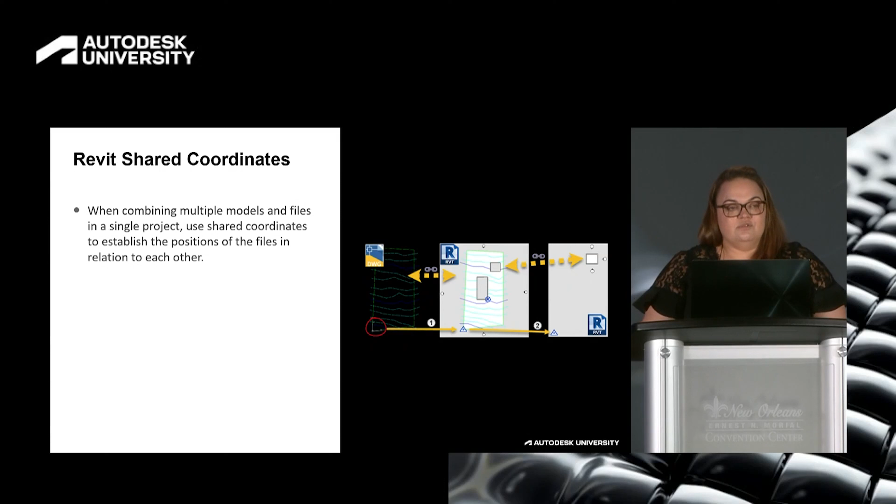Okay. Got it. So shared coordinates are pretty important. When combining multiple models in a single project, they are probably one of the most important things you can do, even though people think that's not true. Waking up in the morning is the most important thing you can do. So we use them to establish positions, especially if you have multiple files that you need to align, which if you're using BIM, or even if you're using CAD or Civil 3D, you still need everything to be in the right place.

So are they the same for everyone? Generalized feelings about that? That would be a no, right? Yeah, okay. I really wish, because if Autodesk could figure that one out, I swear I would just come work for them and call it a day. But no, there are global coordinates, GIS coordinates, grid coordinates, project-based, state planes, and then our favorite term, shared coordinates. Now, shared coordinates mean nothing to anybody who doesn't use Revit. They just want to hear geolocation.

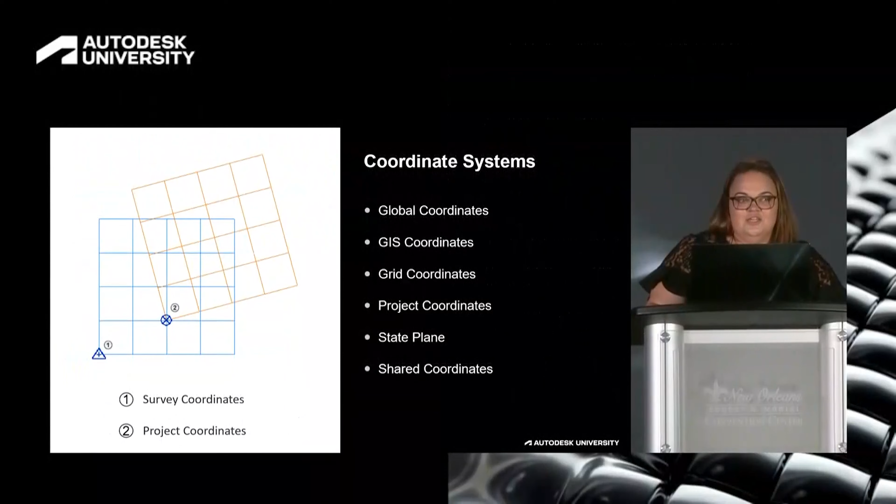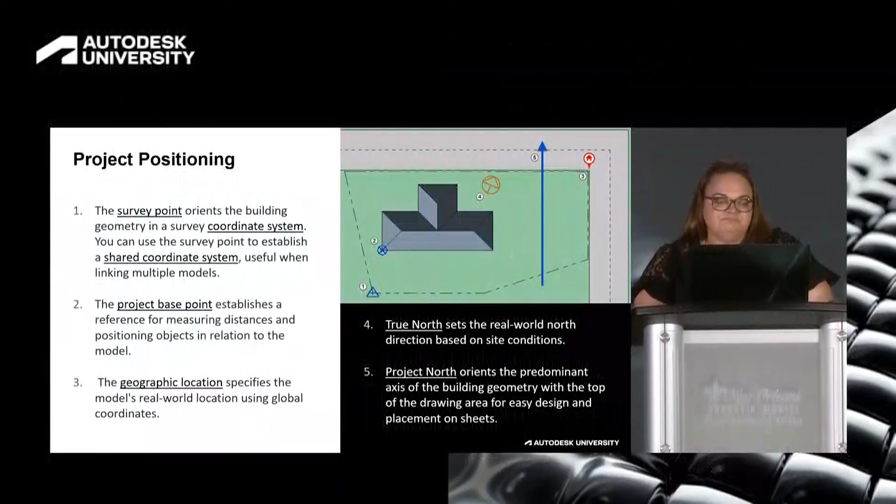So we'll talk a little bit about the relativity of internal origin and the base point and the survey point and your levels, just because I want to give a general background for you. If it's too boring, I won't shun you for looking at your phone. It's fine. Survey point is something that orients the building geometry in the survey system. It is used in Revit to base your shared coordinate system off of.

Now, there's also a project base point, because one thing to work on was not enough. Project base point establishes the distances and measurements, but it is pertaining to each individual file. And then there's the geographic location, which just tells you where it is in the real world, but in reality, in a Revit file, doesn't do crap.

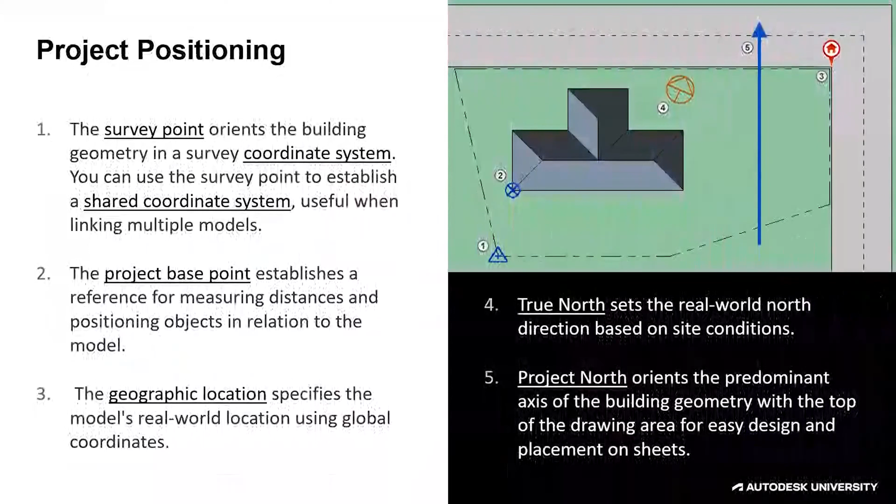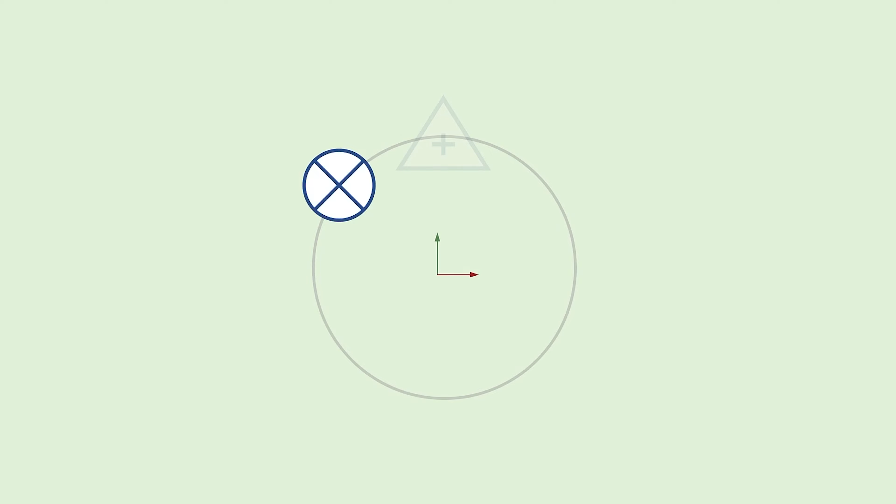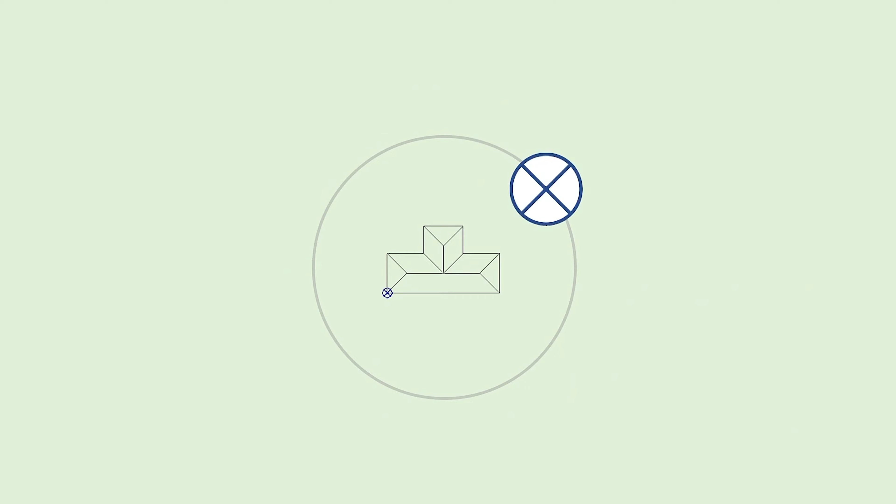It's fine. So this is how I try to describe it to my staff. You have an origin point of the file. Most files do. Then you have a survey point, which relatively revolves around the origin point. You have your base point, which also revolves around your origin point and your survey point. The survey point will dictate where it is in space or in the real world, and then your project base point is where that file is around everything else.

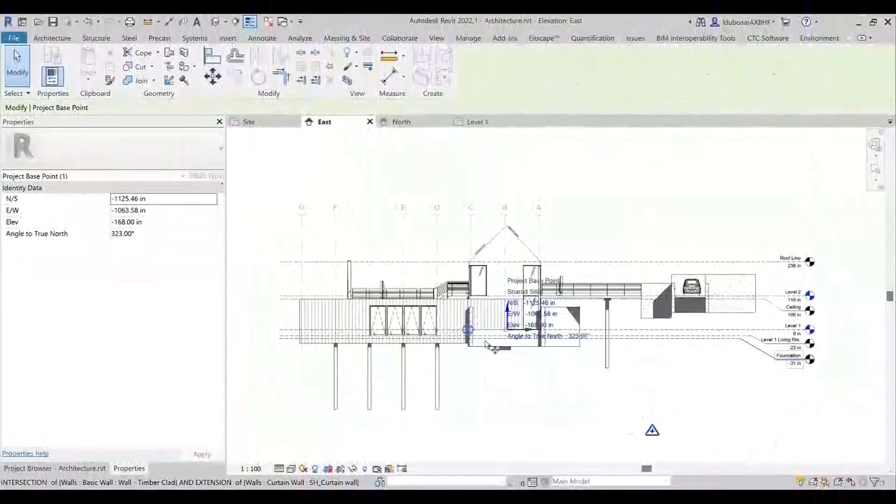The project base point, which is being indicated, that's going to tell you where those levels are going to sit. So the levels themselves, because more complications are great, there's two different ways to do that. You can tell that project base point in the levels to be showing whether or not it's relative to the survey point itself or relative based off of sea level. Again, that's one of those things that's a hard thing with the contractors.

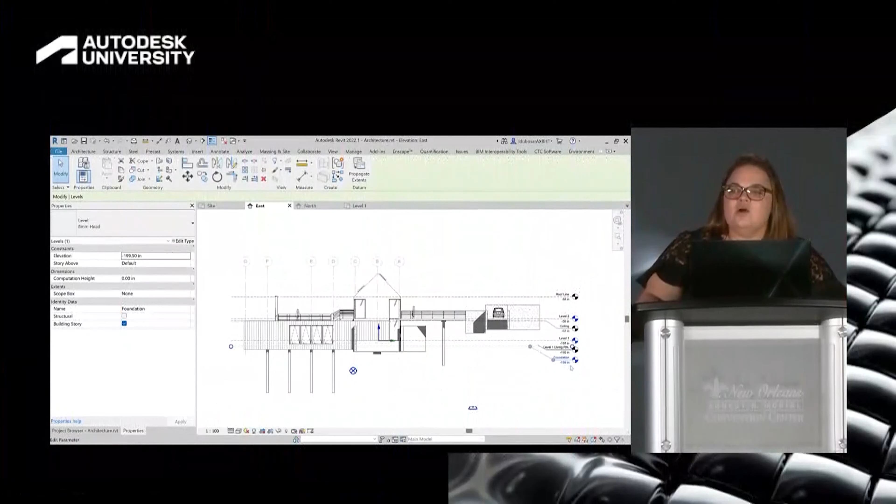No offense, guys. But my favorite question is when somebody goes, can we show both? No, not without a lot of extra work. Please don't ask that question. We hate it. It's okay. You want to coordinate with your contractor as much as humanly possible. And see, you guys like me again when I say that.

It's true. The earlier you talk to a civil engineer, the earlier you talk to all your consultants about what their preference is, the better off you're going to be. A lot of architects, don't hate me now, a lot of designers in general, end up being in a silo. So how often do we end up getting a civil survey before the project design starts? Has anyone ever had that happen? Oh, one. Damn, you're lucky. Okay, well, you don't count for this one.

I have never worked on a project as an architect where I have received civil information before somebody decided to jump the gun and start designing on a project. And I really wish I will one day. Who knows? The biggest thing is when you sit down and try to figure it out, you don't want to ruin everyone's lives by setting them up and then making them start all over and causing extra work, because then the client gets a little pissed off at you when you add an additional service on at the end of the day and you say, well, I worked an extra 15 hours to adjust my files. We all love that one.

So do you need to establish them? Guesses? I see yeses in this and a no. Honestly, no, you don't have to. So not technically, right? However, do they make site coordination easier? That's where everybody goes, yes, they do. Hell yes, they do. Are they a pain in the ass to set up? Yes, they are. So who's responsible for establishing them? Yell out answers.

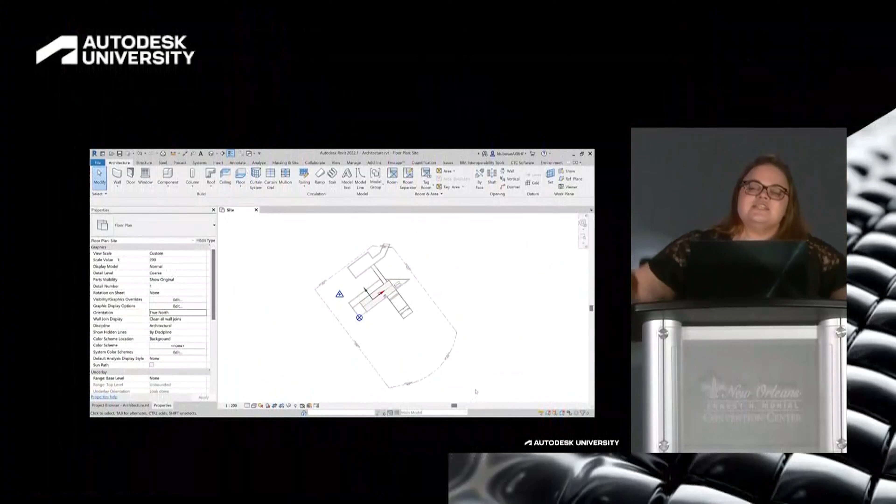We create a holistic, singular file for shared coordinates that ends up getting shared amongst all of the consultants. And that file is usually based off of the survey. I say usually because there are instances where your survey point or the information is miles and miles away, like miles. Now, who in here knows that Revit doesn't really function that well away from an origin point? All of you, just raise your, it's okay. Yeah, they haven't quite figured that out yet. One day, probably not, in like 2050.

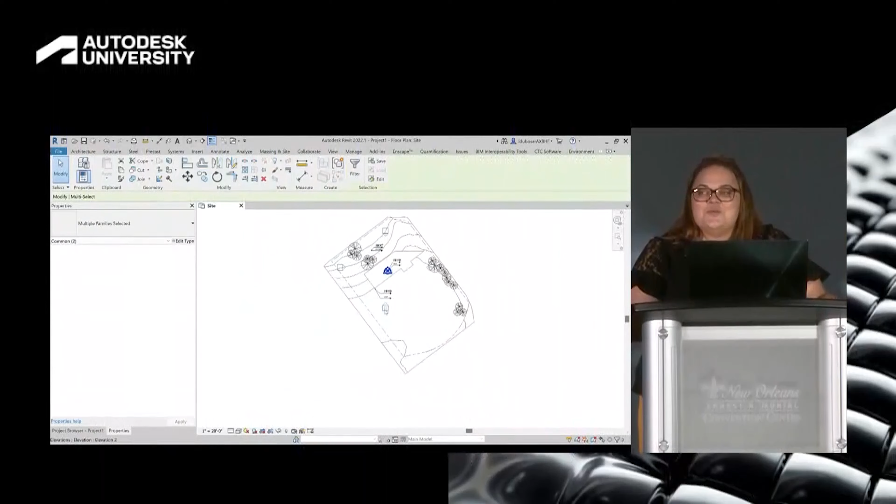Essentially what we end up doing is, if it's within reason, we take the civil survey, we create a standalone file, and we import it after cleaning it. And I have to say clean it because, no offense to the civil engineers, there's a whole lot of crap in there I can't handle. It's just a lot. So we clean it, showing usually the site boundary, and we work with you to specify which of those control points we're going to use as our shared coordinate point.

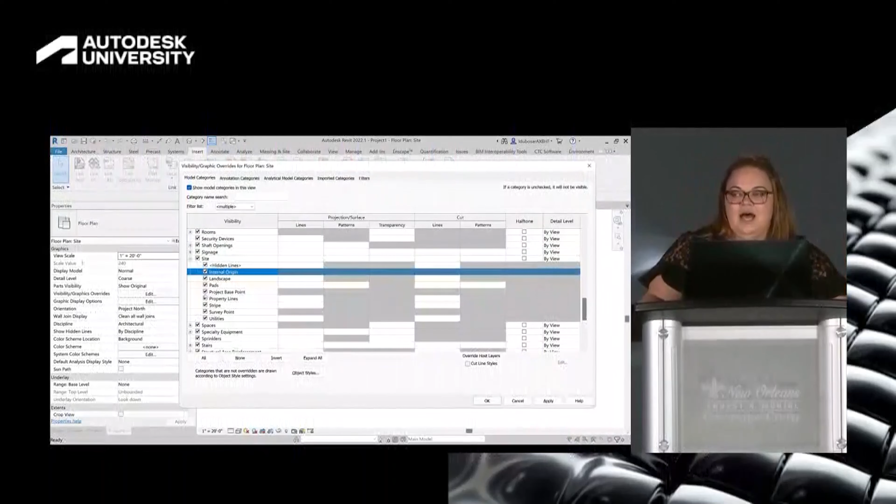All you need is one, not 4,050. However, it takes about 6 months to try to get the point across that we only need one. Sorry. And that's for everybody. We're not great at communication. So you need 1 point. You bring in that file to true north. That's very important, is how we do that.

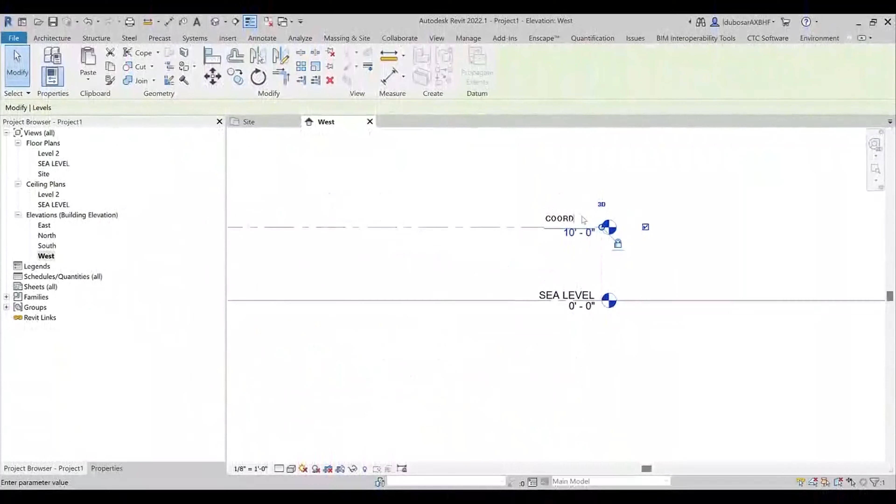We set 2 levels. We set one at sea level, which is our 0, 0, just for the shared coordinate file. The other is going to be where our coordinates are, like the survey file or the CAD link, not import. Please don't import. Makes me sad. Link the CAD, because you will end up getting updated information inevitably, or at least I hope so, based off of Civil's info. And that is where we're going to place that one file, right? So it seems relatively easy.

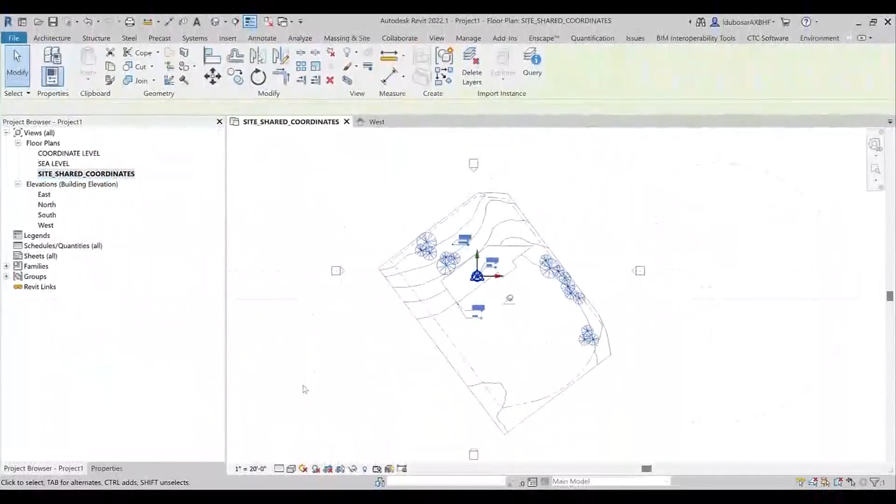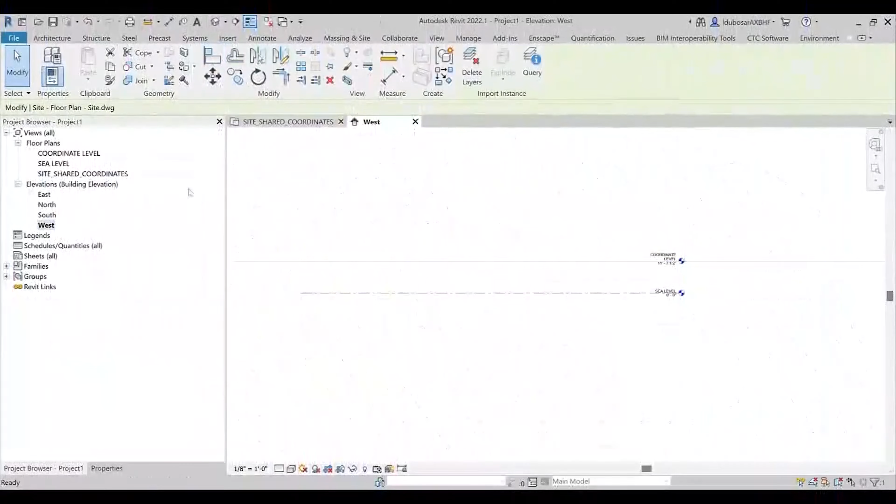The other thing you're not seeing on the left-hand side, we have deleted everything out of this file that we possibly can. Purge the hell out of it. No sheets, no schedules, no nothing. All we have are the base views that we need, and it's really only one plan view, and a couple of elevations if we need them, and that's about it, right? There is a strategy behind that method so people don't get confused later on.

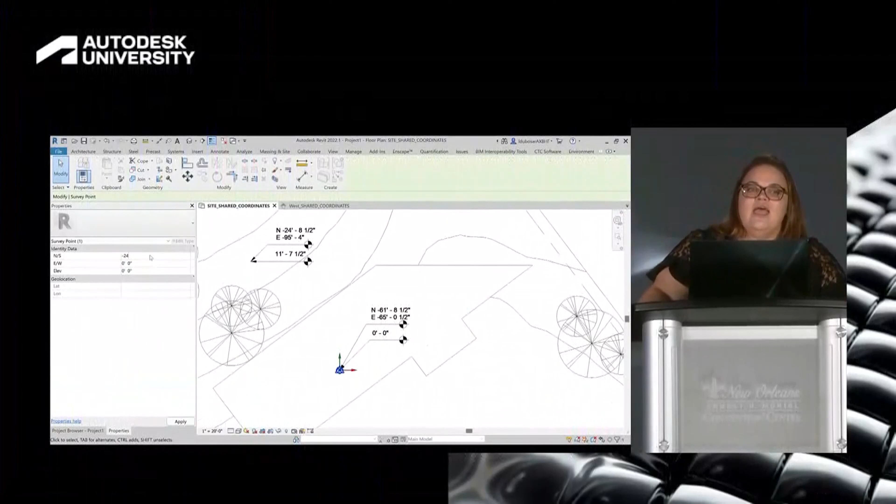So we're labeling everything because, you know, we have the most patience in the world to be able to do that. And only BIM people right now and managers and coordinators will sit down and say the importance of this. If you ask a designer, they're going to leave it View 1, View 2, View 383, because it's super helpful.

We're going to indicate and move that survey point based off of the information, which we have also left in that file so that people just have to see it in their face. We're going to place that survey point after we've unclipped it and entered the information. That way we can put that survey point wherever the hell we want. It could be on Jupiter, and I'm still saying it's on Earth. However, our mileage restriction in Revit might have an issue with that.

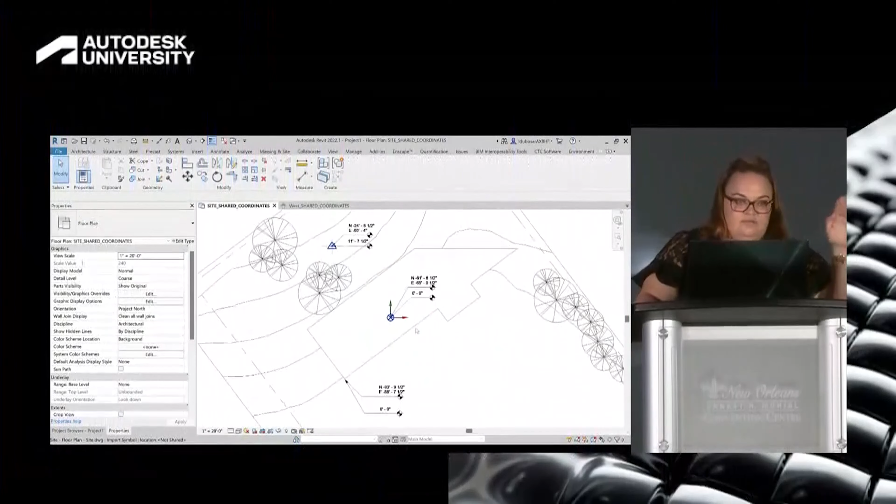So after that, you want to place your project base point, and that is relative per file. We tend to leave it at the origin point. It's way easier to handle, just for the shared coordinate file, not for the individual building files, right? Then we go through and make sure that everything is where it needs to be elevationally, because we check 4,000 times to make sure we didn't mess this up and have to do it again. And then you pin everything as much as you possibly can.

And also, the reason we have a separate file is because we don't really want sticky finger syndrome happening, right? I don't want anyone touching my single source of truth. So we use BIM 360 or ACC or whatever they're calling it after our keynote this year. It is really important for us, especially in a cloud-based environment, that we get this right, and then nobody ever touches it other than people who understand how it affects everything.

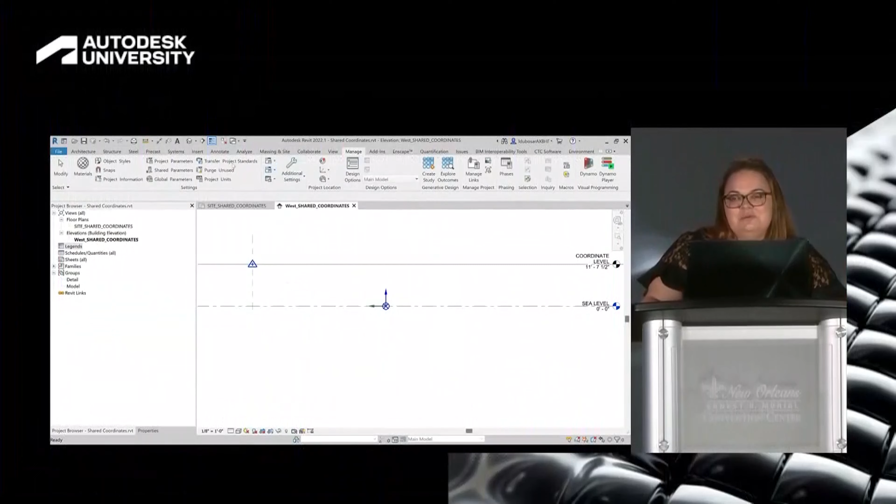As you can see, we purged 3 times. Who knows why we purged 3 times? Not one of you knows why? Nesting. It's a pain in the ass. 3 times will get you your magic number.

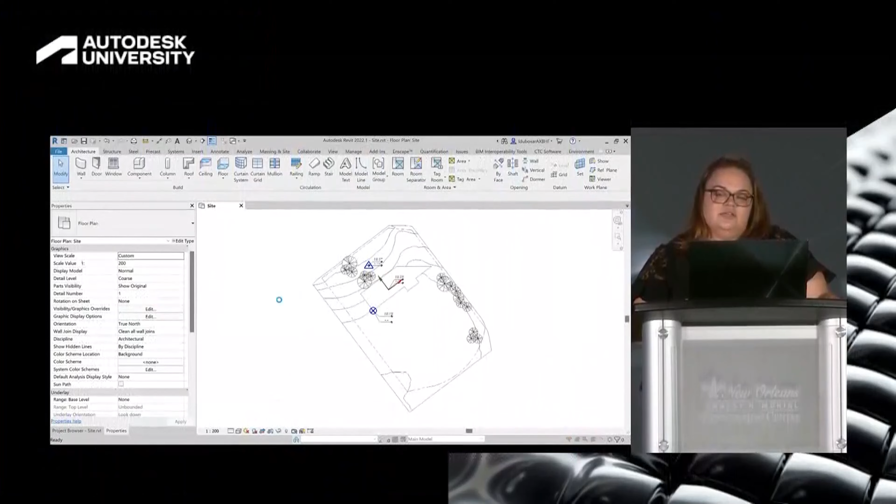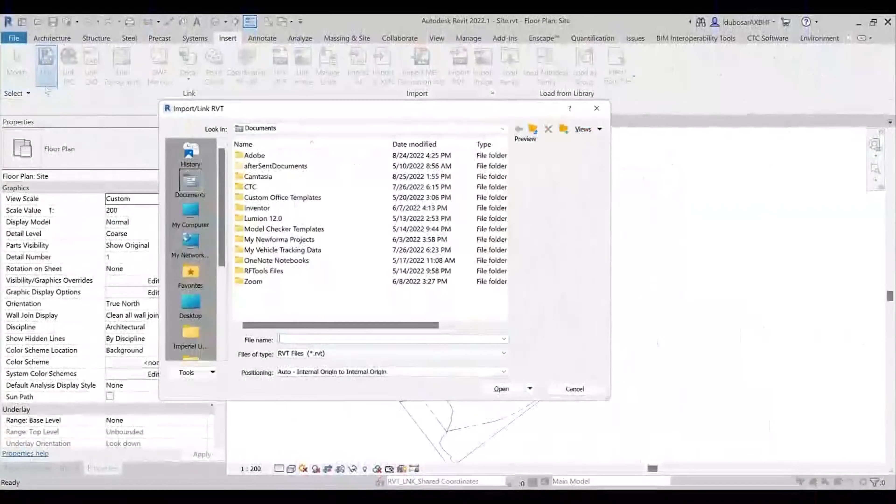After we do that, we're now pretty much theoretically set to acquire the shared coordinates, okay? So you're going to bring that file into your individual building files, whether it's MEP, structures, architecture, site file, you name it, it's going to be brought in. Now, again, we label everything. We put them on the appropriate workset because I love giving lectures on how standards are followed every day. We all follow them, right? Yes. Not really.

We always link in based off of internal origin. The reason we do that is because this file will float in space. It's not set up yet, right? It doesn't have the coordinates set up.

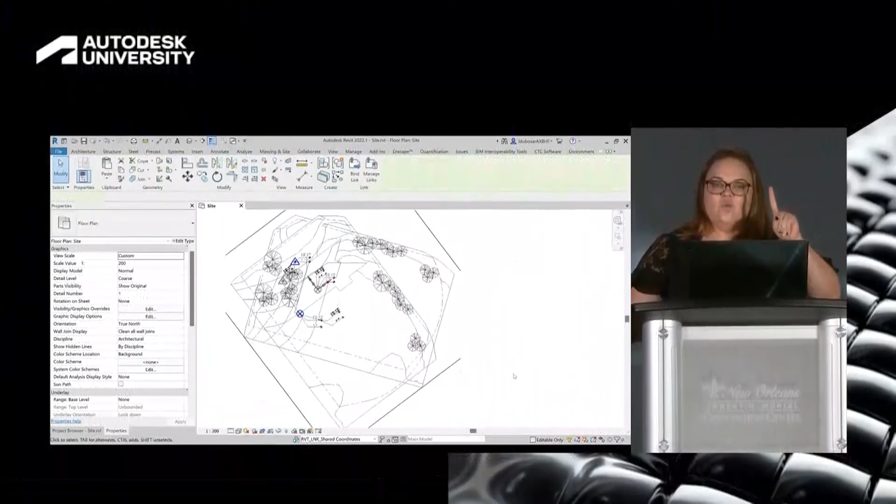Now, what you just saw was why we only have one plan view. We set it up by linked view because it's 2D information. By doing that, you're ensuring you're seeing exactly what we did in the shared coordinate file. There is only one option when you sit down and say by linked view. There should be no confusion after that. Does that mean we still get phone calls? Yes,

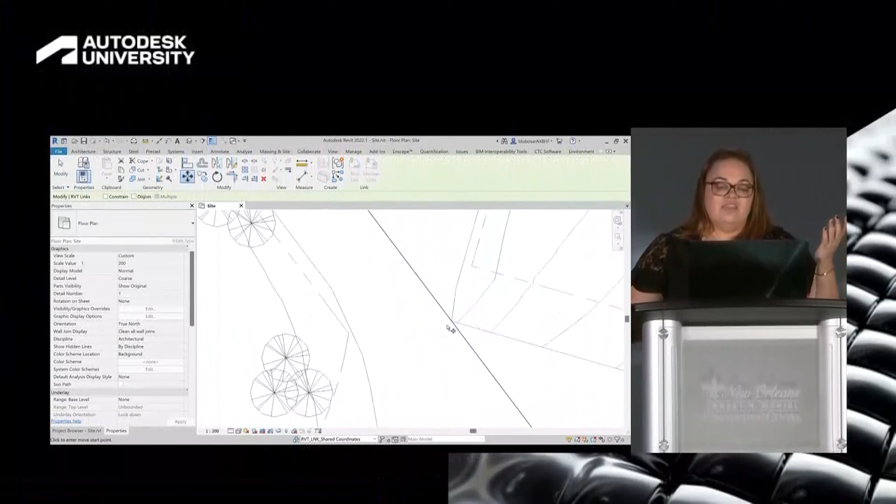sadly. We then are moving this file in place, and some of you are like, why are you moving it? Shouldn't it just be set up that way? No, sadly, because all of these files are usually worked on already. We're in the design period.

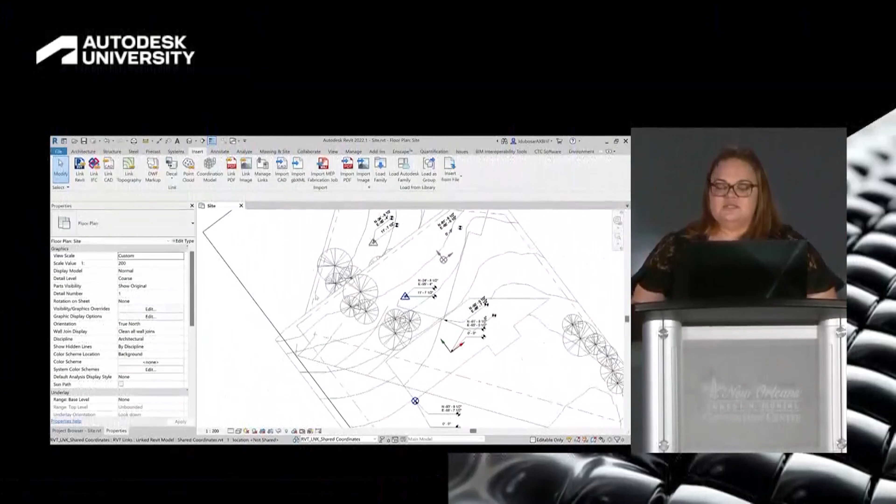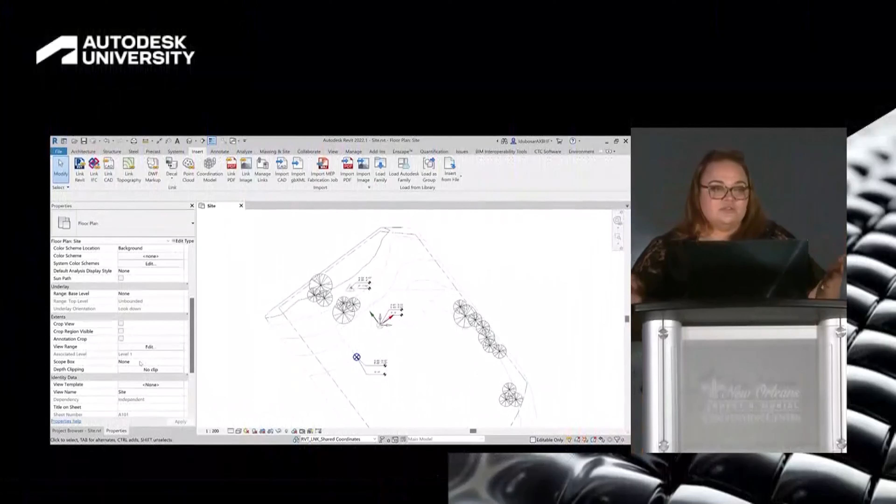I love it. I had a landscape designer say, oh, well, we flipped all the surveys upside down so that we could adjust it based off of the architectural file. I cringed, cried a little. I got over it. And then I said, well, there are ways we do things, and that is not one of them. So the reason we use this file is we're doing the same thing as what he thought to do, just never touch the survey because that is a single source of truth. And also your civil engineers will cuss you out behind your back.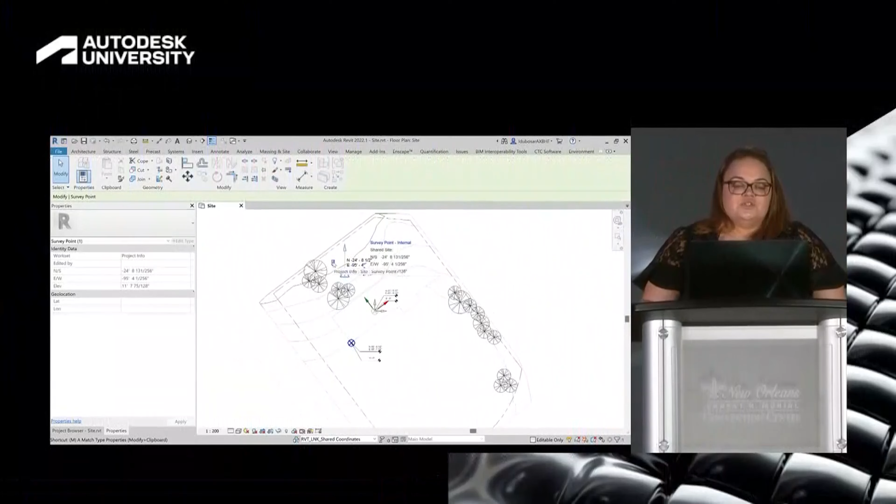So we're sitting down, we're putting everything where it needs to be. We create a separate set of views that are directly on each of the building models so that if anything ever happens, which it inevitably will, we are able to go to those views. We are able to sit down and say, okay, where did it go awry? So once everything's in place, we've oriented this file, we've made sure in location it's where it needs to be, our northing, our elevation, our easting, everything is golden.

We sit down and we say, okay, let's acquire. So, oh no, what happened? I clicked it too early, right? Well, thank God Autodesk finally put in a reset shared coordinates button. Otherwise, you're sitting down and starting this all over again.

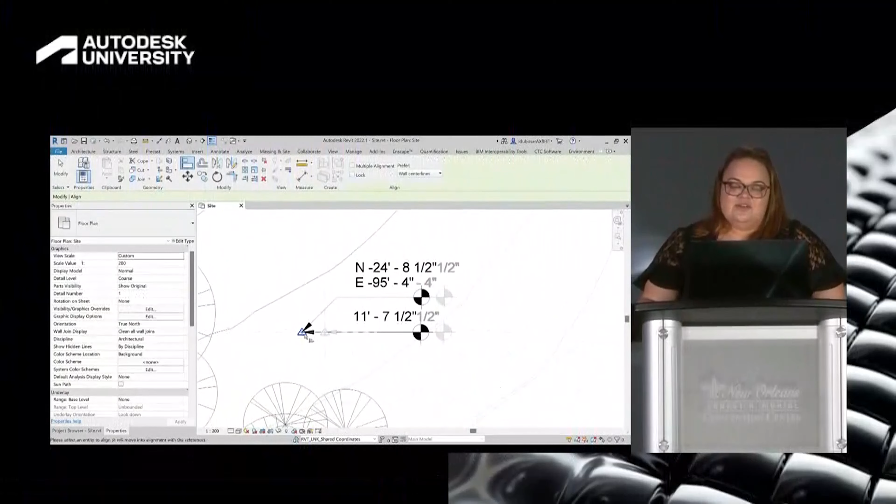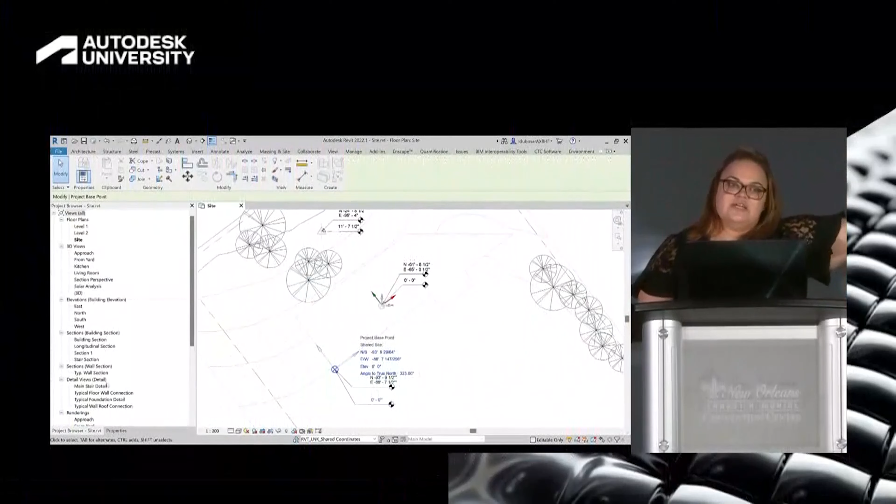As you can see there, we also have a reference plane because that one spot, depending on your graphics card and everything else, will appear to be over here when it's really over here. And they're saying they're the same thing, but they're not. So we use reference planes just to align. We're making this as easy as we can for anybody to understand. We also provide step-by-step instructions of what we're going over now. Also, those are included in your handout, so you're welcome.

That's my life's work. I'm retiring now.

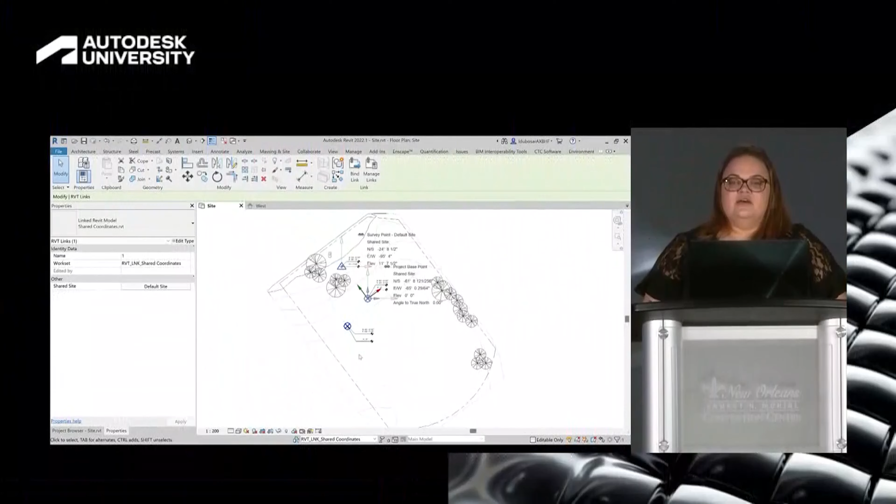I wish. Vacation. So we're sitting down and saying, okay, acquire from this file. What I often see as the biggest error is that, well, people don't read, because that's a given, right? Like, why would we do that? They will almost always acquire from a site file.

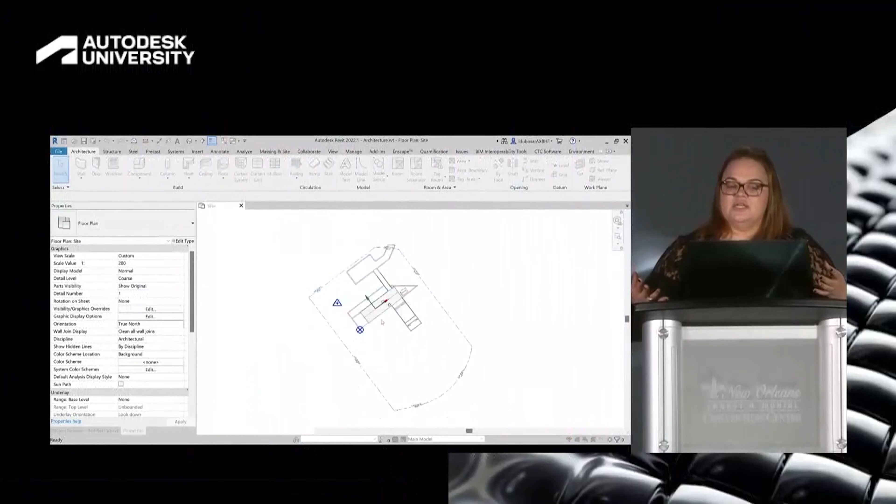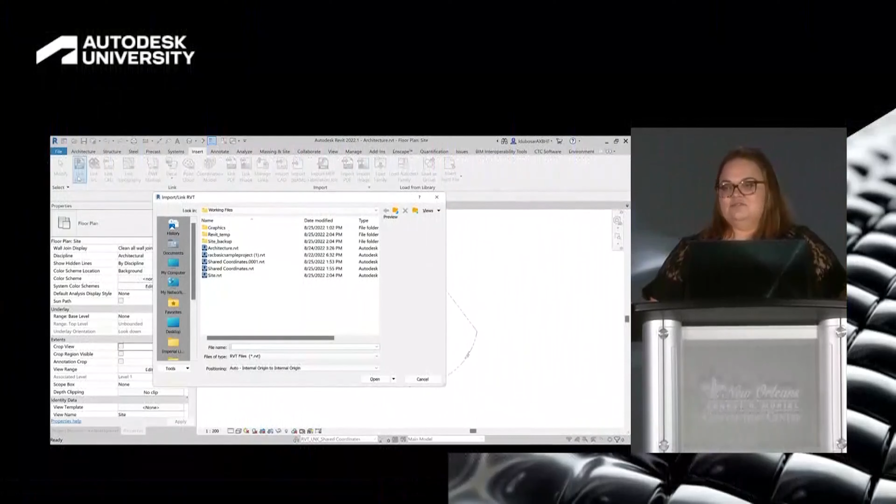So we have our landscape designers working in Revit, which is fantastic because it really works well for coordination. However, what that also means is your site file is chock full of good stuff, meaning so heavy that every time if you were to load a site file into every building, you're adding that much weight, that much more megabyte or gigabyte, depending on the situation, to the individual building file. You're also going to eventually get a circular chain of reference, or I'm not nesting this, and blah, blah, blah.

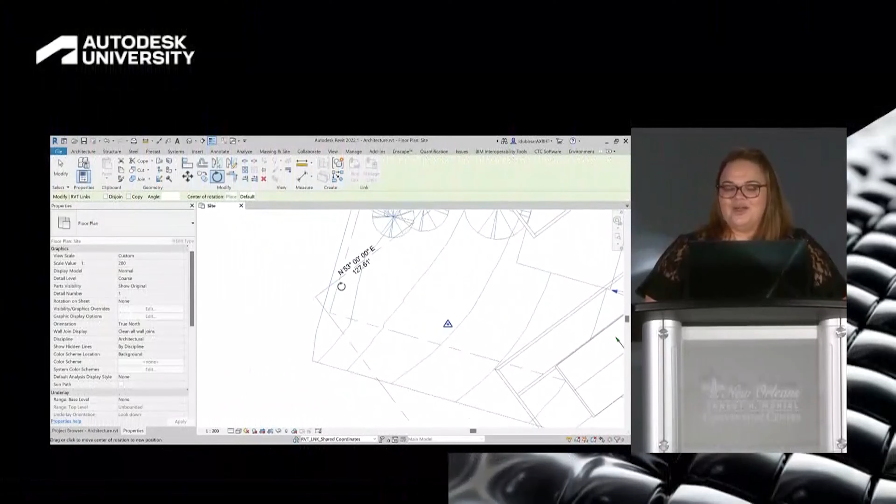So we specifically create this file because there's nothing in it. It's 2D line work. It couldn't be more streamlined and smaller. If you do it from a site file, that's okay. You can. You're just going to struggle if this is a huge project. We work on large planning projects the majority of the time. I don't know about you, but we've always had the one person say, I can't open the file today. Oh, well, you can go home now. No, not one of those options. So, we're aligning. We're doing the same thing all over again. And it's just so much easier that way.

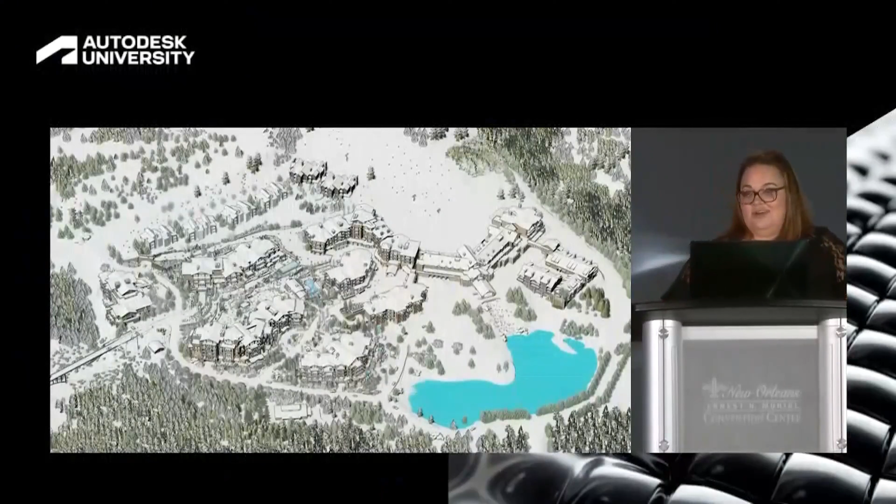So my favorite phone call at 8 o'clock in the morning, because I field them from both coasts. It's great. Help! Something went wrong. What do I do if it's messed up? Well, okay, so part of the case study and the Bavarian-esque influence: we have one of these projects. This particular project is in Montana. It's Yellowstone. We call it Yellowstone.

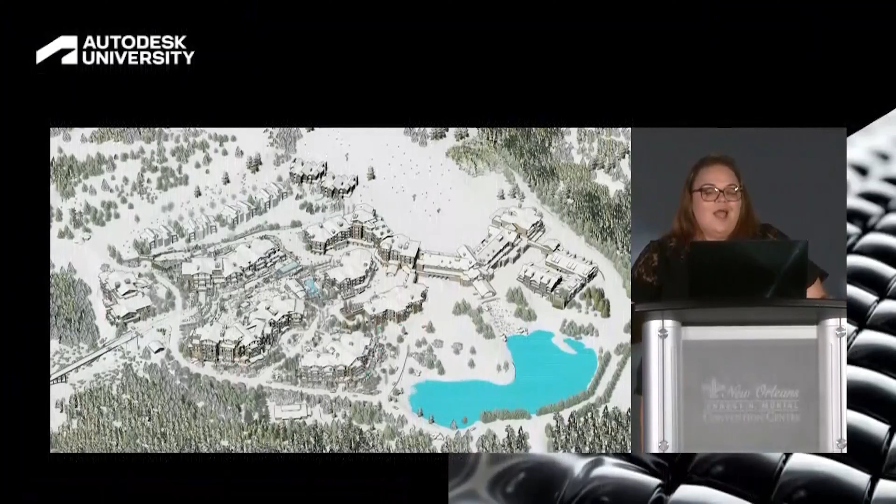It is a beautiful project. Who wouldn't want to be there, right? It's great. We also use our Revit file for our rendering.

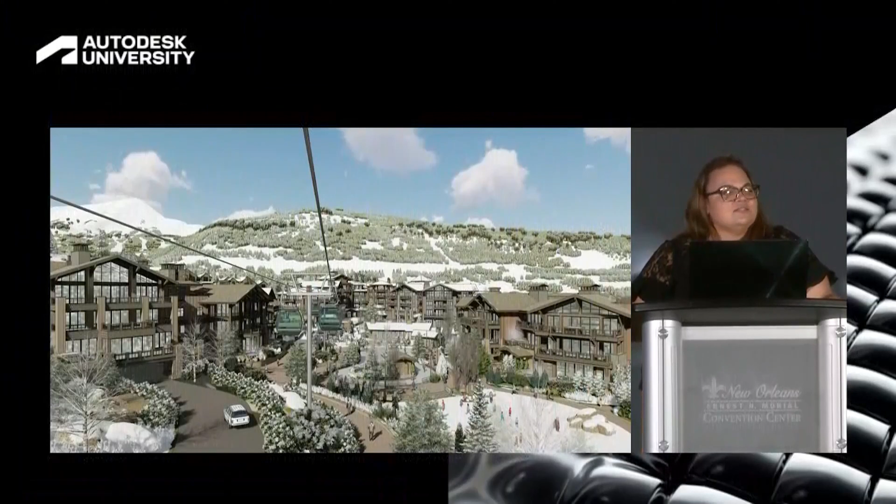Also another important reason why shared coordinates are super important, because if you change them halfway through, I'm going to get another phone call from my renderer saying, what WTF is happening now? All of my work is different. And I know all the contractors out there are like, I really don't give a crap about your renderings right now. I have to construct something. It's okay, I know. It's my job to give a crap, it's fine.

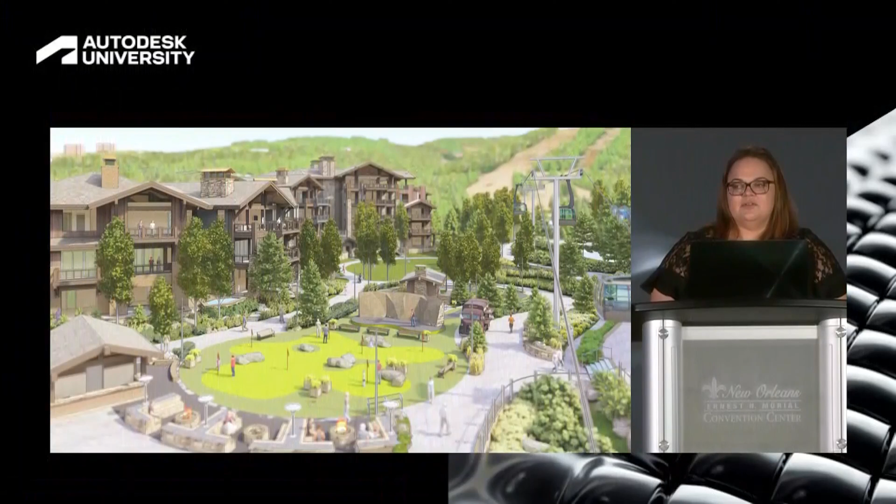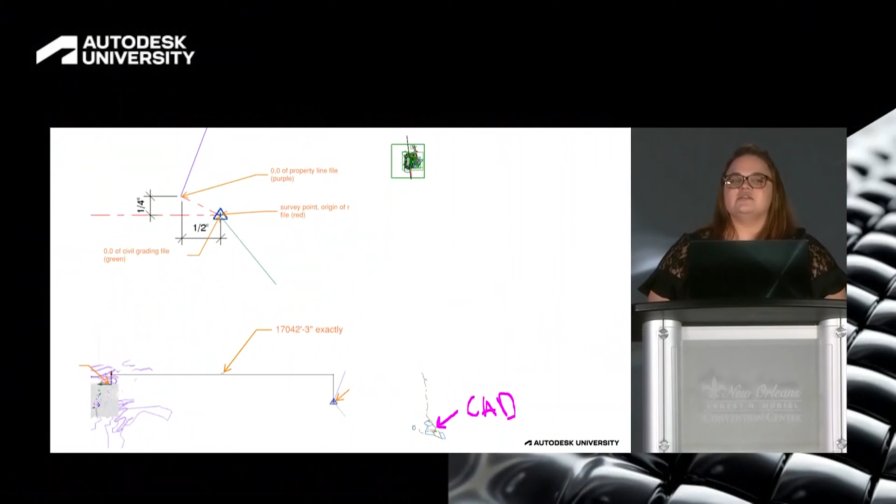So, this particular project, we found out in the middle of CDs, right? We had one gentleman go through and say, something's not aligning properly, which is the best phone call to hear, like 20 to 30% CDs. Yep, okay, so he went through and tried to find it. It was off by 3.5 inches. A lot of you are like, oh, big whoop. When I sit down, the contractor is going to say, I'm not going to care about that.

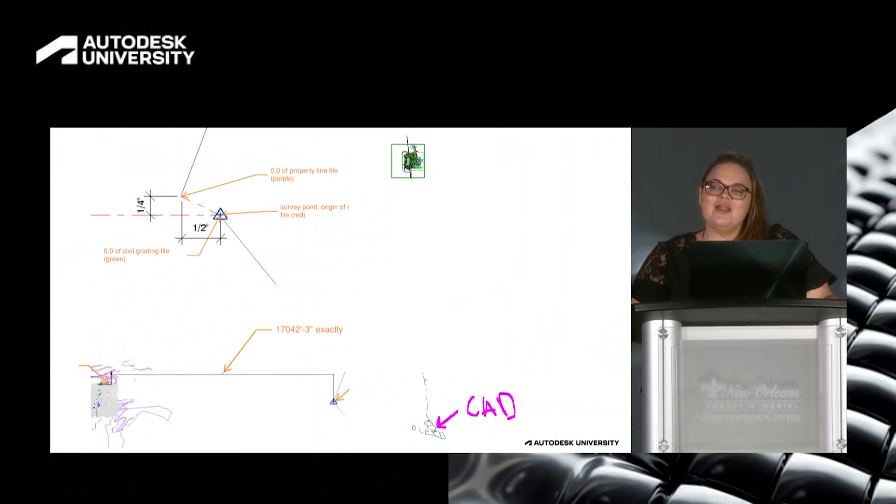However, what happens if the project has multiple phases over 15 years? So a building already exists. It's great. How do I actually align that? Well, he goes, the CAD's over here. It's shifted over here. The next day, it was a different location because no one can figure out who's grabbing it by accident. Accidents happen. They make me twitch, but they happen.

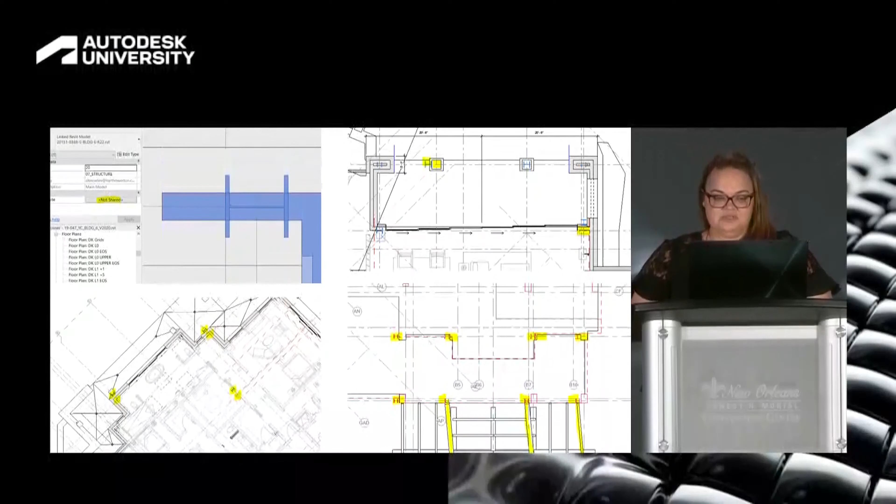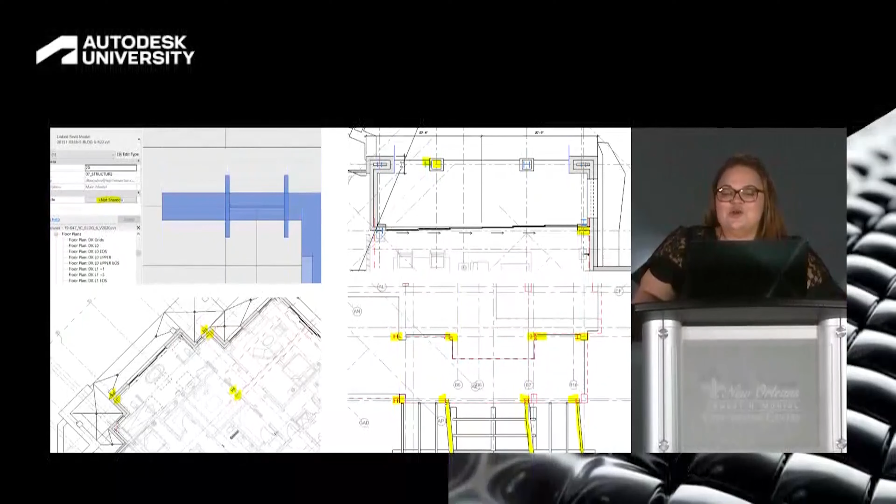Then all of a sudden we get a call from our structural engineer saying, well, all of our columns are misaligned. It's great. Spectacular. Awesome. Let me spend the next 4 or 5 days on the phone with you to figure out why. So everybody else sat down and goes, well, it's just 3 inches. They keep ignoring it all over again.

We ended up finding out that, and here's the important thing, someone picked the wrong file again. They acquired from individual building files and thought that was the case. It happens, fine. Unfortunately, now we do have to fix it, and it takes a lot of time to do that. And who has to pay that? Money is time, time is money, all of those things.

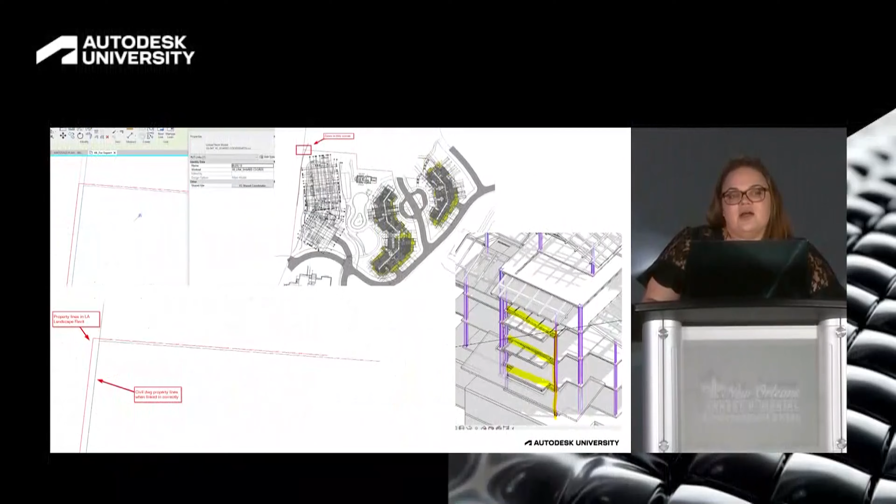So what ended up happening, and it does happen, when people set up their backgrounds, if you're not extremely precise and your dimensions are extremely precise, the precision on this was off by like 0.006358, like any influence of pi in rotation. Not off by the same everywhere, but in rotation, and we had no idea where the hell the rotation started. It was great. It was a great day.

So what had to happen, I spent the next week and a half fixing about 82 files. I did it for everybody. I did it for all the consultants too, because they sat there and thought I was gonna kill them or something when they're like, I don't know, I don't want to touch it. Neither did I. I mean, geez, you do it. We fixed it. It was great, I swear.

Will there be another instance of this? Almost definitely. I just don't want to receive the phone call. I'm going to forward that to the rest of my team. Sorry, Jeff.

Here's another one for you, because we all have that. And I already know the civil will say this, but how many of the architectural designers in here, et cetera, understand vertical datums? Because I had to educate the hell out of myself about this. Also, giant nerd, so I found it fascinating. It's fine. Maybe not for you. You guys can tune out and watch your phone.

There are so many of them based off of time, right? One of the biggest things about the projects that we do, especially in our firm, we have clients for many years, decades, who have started one thing, then went to another, then went to another. And so we have buildings on buildings on buildings, entire valleys, right? So we're going to watch a little bit about geodetic datums, what datums are, how they're established.

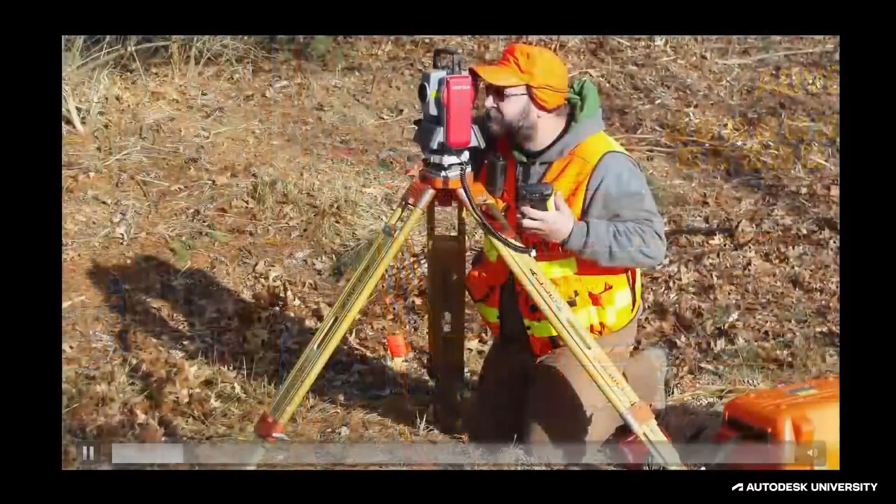Do you ever think about how location information impacts your work? Accurate positions and elevations are critical to construction projects, floodplain mapping, scientific endeavors, and much, much more. Surveyors use scientific instruments and field procedures to collect information about positions, distances, and elevations.

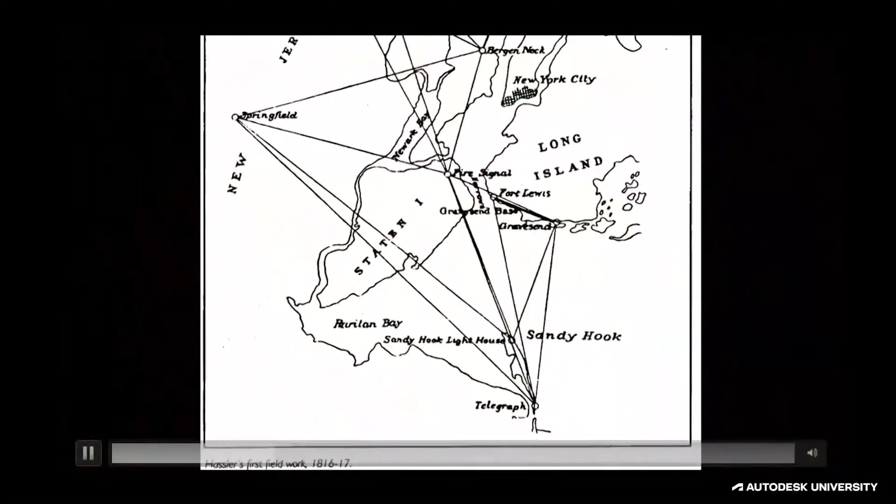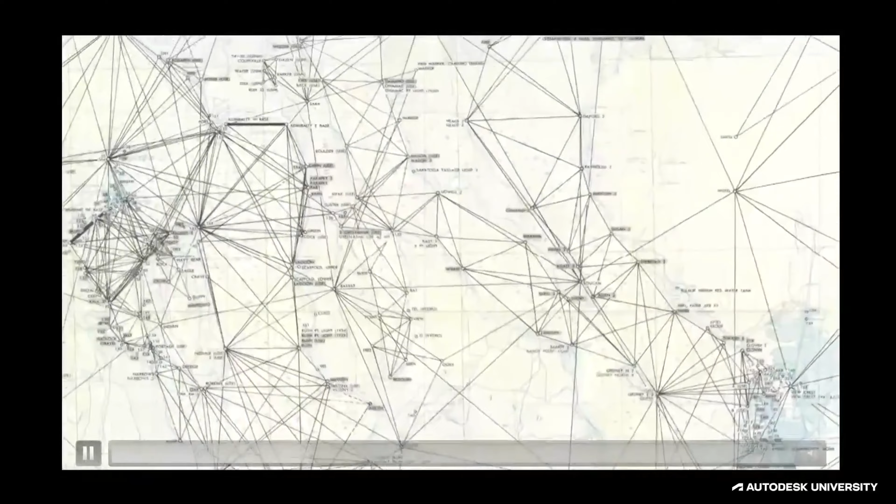Then, this information is used to create geodetic datums, reference frames used at a national level to assure consistency across mapping applications. Geodetic reference frames have a long history in the United States, dating back to the 1800s. In 1807, President Jefferson signed the act that established the Survey of the Coast. Work started by measuring angles and distances between points across the country. This formed a triangulation network that continued to be densified over the years. This network would become the basis of the future horizontal datums.

Okay, how are geodetic datums established? Pretty easy, right? We did that. I just gave you a massive history lesson that all of you did not want. History nerd, deal with it.

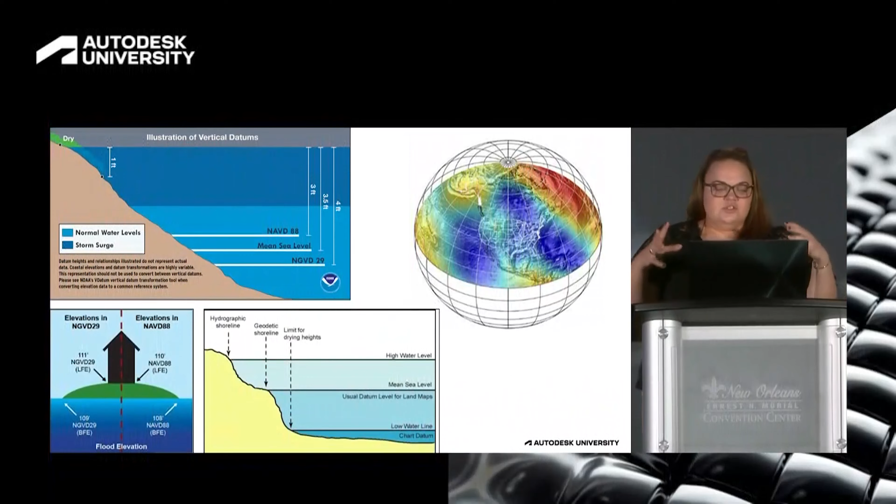So here's the thing. We sat down and had this project happen, and we say, okay, here's where NAVD 88 is based off of when it was measured and established. Here's where the sea level is. Here's this, here's that. Here in the world, triangulation, it's fantastic. I actually do think it's fantastic. Then we have a project which may look similar to the last project because we do a lot of projects for ski resorts. It's okay.

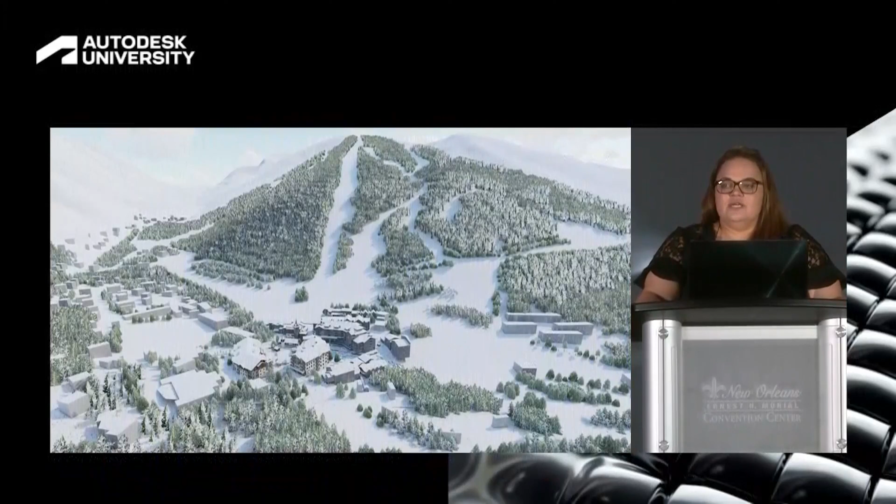This particular project got an email one day, just a very small email. The whole thing has to be resurveyed because the last survey that was done was 15 years prior. So okay, the client hires the surveyor who's supposed to work directly with the civil engineer, because that happens really well all the time too. And I get this email saying, oh, by the way, we're using the new datum. Excuse me? Okay, sure, why not? Then all of a sudden we get these new survey files, right?

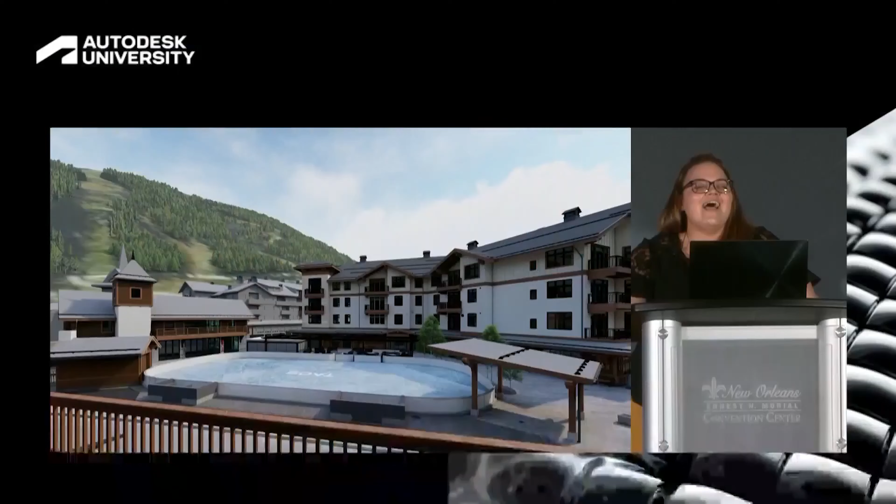And again, nothing's aligning. So I start looking in elevation and I start looking in plan, and 3D, like I don't understand. And so I call up our civil engineer. I'm like, does this look a little wrong to you? And he's just like, literally nothing is where you think it is. Now, someone just told me that my entire universe is different. So 5 feet over there isn't really 5 feet over there anymore. It's like 25 feet over there, but then that building is about 35 feet off of where we thought it was over here because the land changes over the years.

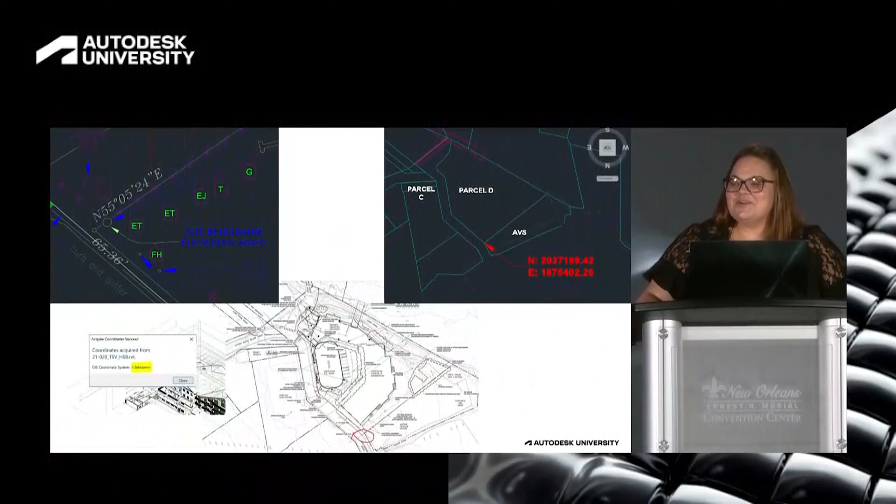Whether it is tectonic movement, whatever it might be, rocks fall, wherever those points are that they took it from originally are no longer where they are now. Cool. What do I do with my shared coordinate file? I don't know. Well, okay, great. So we sat down and had to establish, because we already had built buildings, all of a sudden the property line was no longer where we thought it was. And our existing buildings, according to the new data, were over our property line. Because, city loves to hear that. Great. So we did the best we could. They weren't going to penalize us for it.

We had to create brand new shared coordinates. Unfortunately, this project is a bit of a blunder. It's an entire valley. We're talking miles and miles and miles. So we have multiple shared coordinate files, and they're all different. It's okay, just depending on the region that we've developed. Sometimes that has to happen. It's not ideal. I'd love to have a single source of truth, but depending on what we develop and what phase you're in, that's just what happens. So are there alternative methods to handle this and establish this? Yeah, of course there are. This is just what we have figured out to be the easiest for us to maintain them and help our consultants do it.

Unlike a lot of my architectural peers, and I'm not being sarcastic, I swear, I feel the pain as a consultant because I've worked as one before. So every change shifts. We have to increase our staffing. We have to increase the amount of time that we have to dedicate to this, where I can't put it on another project, because a client loves to hear you're not focusing on their stuff 24/7. And that's just what happens.

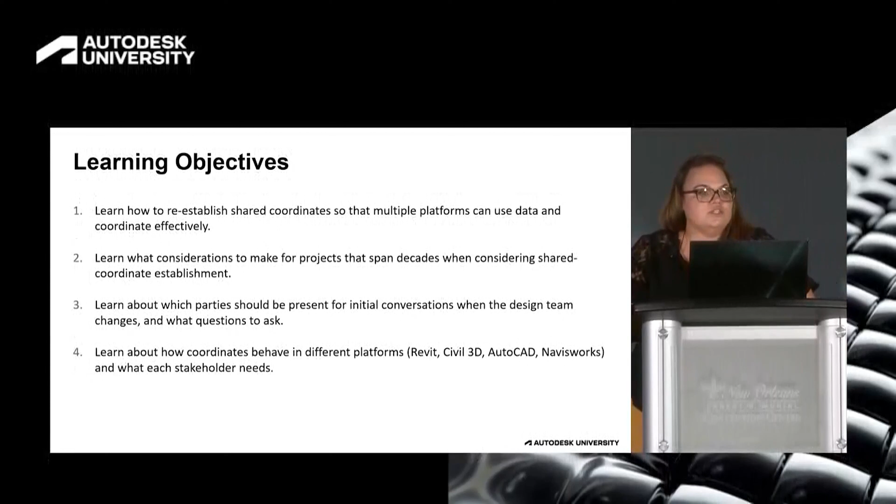There are no shared coordinates in a Civil 3D file. There are control points. There is an origin. It's all over the place. However, you can mitigate those. You just have to work with your consultants to do it. So there's a bunch of references up on the site. I hope that you check them out and nerd out as much as I do.

If not, I will not be offended. But that is our chat for today, and I'd love to take any questions, concerns, and please don't throw anything at me. If there are any of those. Seriously, I shocked you all. Cool. If you have a question, I've been asked to ask you to go to the microphone just because of our online presence. Because it's so easy for you to get out of the middle of the row. I know it, yes. He's like, I haven't had enough coffee for that. Mic check, mic check.

Okay. Just a quick question. Do you guys use the shared reference point between Civil and Revit? Does it work? Does it not work? It's a mixed bag for me. It really depends on, again, I think some of it depends on how far away those points are. So if Civil decides that they're going to have their control point the actual distance from the origin point itself, like the center of Earth or wherever they're setting it, it doesn't work for us. It's more of a manual process, unfortunately.

Have you ever set up shared coordinates that are aligned to a state plane coordinate system? I have, yes, and I wish I hadn't. This system works for that too, because you're essentially taking everything and telling it exactly where it's going. So just like we did for any kind of control points and the datum itself, you have to coordinate that 100% with your contractor. They're almost always going to stipulate that because they want to get in there as soon as possible. They need to feed that information back.